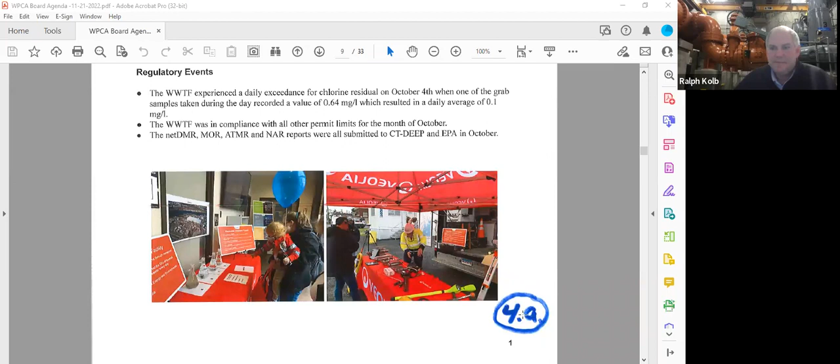Everybody can see that, there's a couple of our pictures from the open house for DPW. So the picture on the left is in the office. You can see that we had different kinds of water - influent, primary effluent water, and I believe tap water on display to show the differences in the treatment process.

And on the right is our camera truck or CCTV truck, and that's our collections manager, Tim Sullivan, showing the public different instrumentations and telling them exactly what they do around the city. So that went very well. Unfortunately, I couldn't make it there, but I heard everything was great.

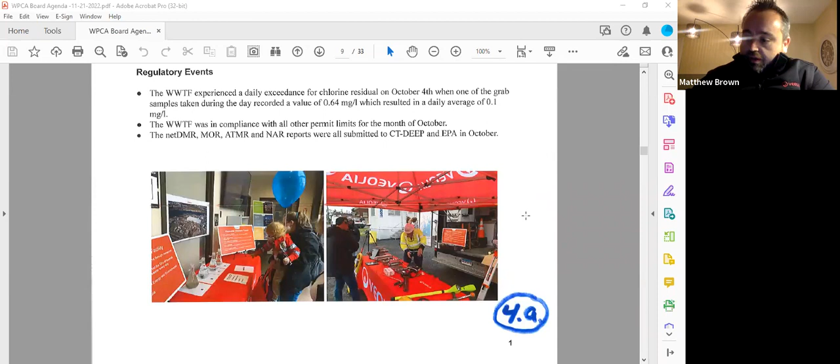So then Veolia, the collections team, we completed over 2.63 miles of TV inspection along with 2.32 miles of sewer cleaning. They also completed 57 manhole inspections. The industrial pretreatment program, the IPP program, we completed 42 inspections, and we're on track to complete all inspections by the end of the year.

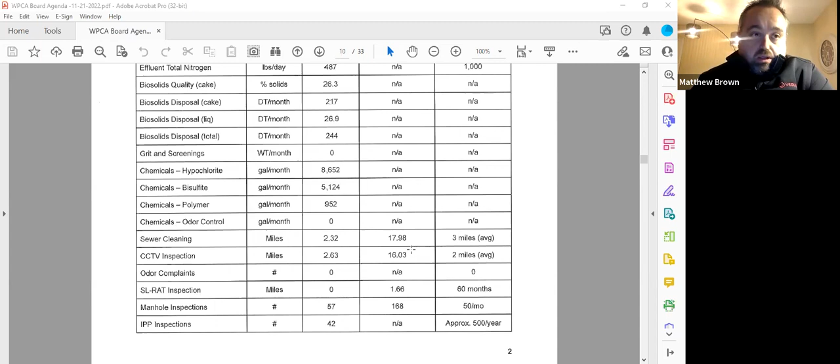We did have one regulatory issue in October, and that had to do with the sodium bisulfite pump losing communication with the SCADA system. We sample residual chlorine every 2 hours, so we did catch it right away, but it did create a daily limit exceedance. As far as everything else, we were in compliance with the permits for the month of October. That issue was corrected as soon as the operator ran the tests - he went out, inspected the pump, and got it running within that 2-hour window.

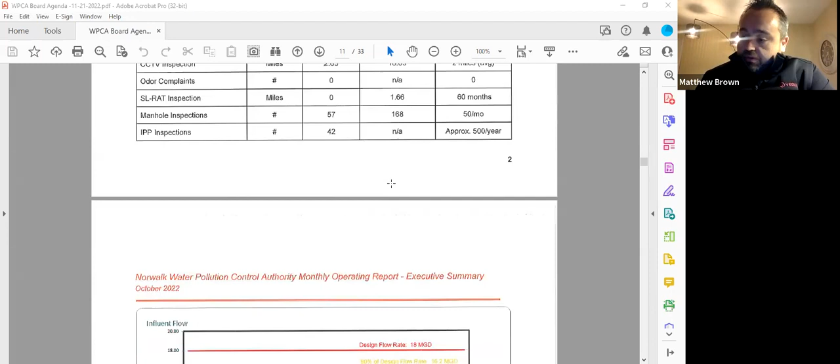The net DMR, MOR, and NAR reports were all submitted to CT DEEP and the EPA in October. A couple things I wanted to point out: our average daily flow for the month was 10.9 million gallons, and our 12-month average flow for the plant was 11.41. Then towards the middle of the page, we have effluent total nitrogen.

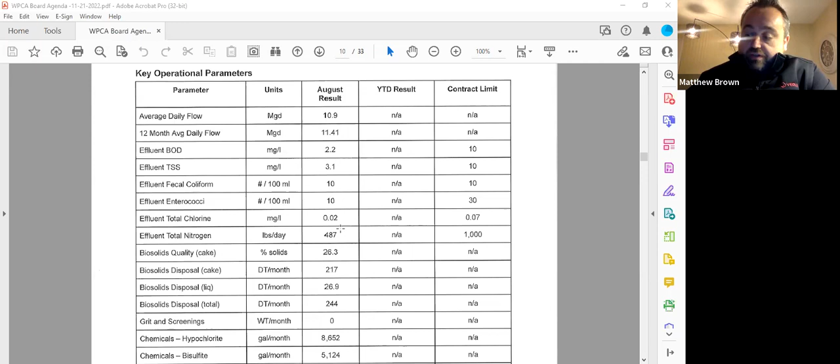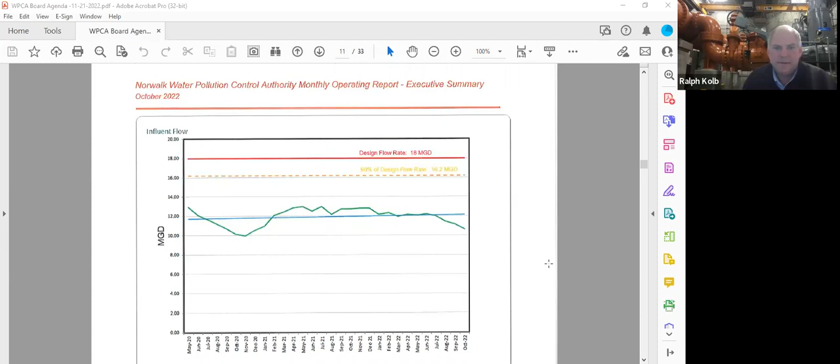Our total nitrogen is 487. Now if you want to go to the graph, Ralph. I believe this is new, correct? That is correct, this is a new graph we started including here. It's the rolling average since May 2020 when we took over to now. This is the influent flow.

You can see the design rate is 18 million gallons a day, it's the red line at the top. 90% of design flow is 16.2. That's the number that the DEEP and the EPA will use to require you to plan for upgrades, right Ralph? So that's why.

Correct, it's in our permit. If we hit this green line, which is the 180-day moving average for flow, if that approaches 16.2, the WPCA would have to submit a plan on either reducing flow to the treatment plant or looking at future expansion. So basically, the difference between the 16.2 and this 180-day moving average is our available capacity at the treatment plant before we have to do anything.

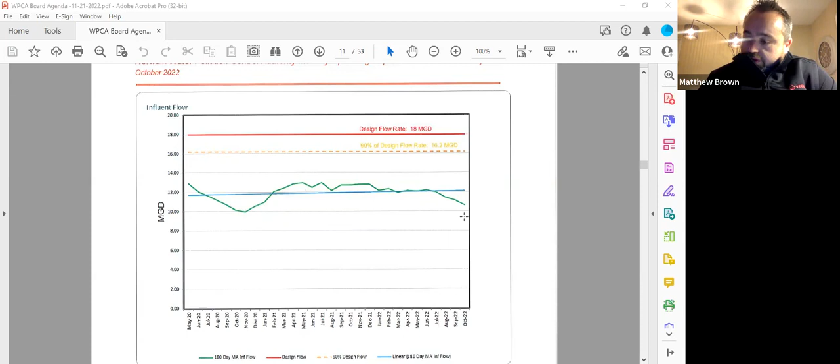I'll point out the dip on the left towards 2020 was the summer of 2020. We had a very, very long drought, very dry conditions, some of the lowest flows in the industry people were seeing in the Northeast. But on average, for the past 12 months, we are at 11.41, so we're quite far away from those numbers. And then I think that was it.

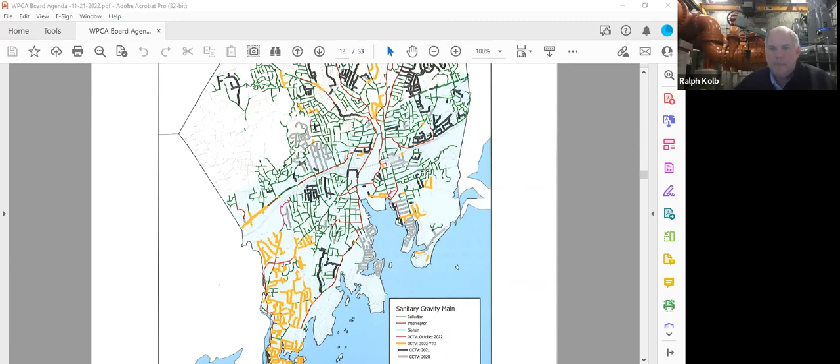And then there's 3 PRFs. You need to share those, Ralph, or do you want me to just go over them? You can just mention them. Okay, let me just take 1 second to bring them up.

Actually, hey Matt, item 4C is the contract year 3 letter. Let's talk about that first.

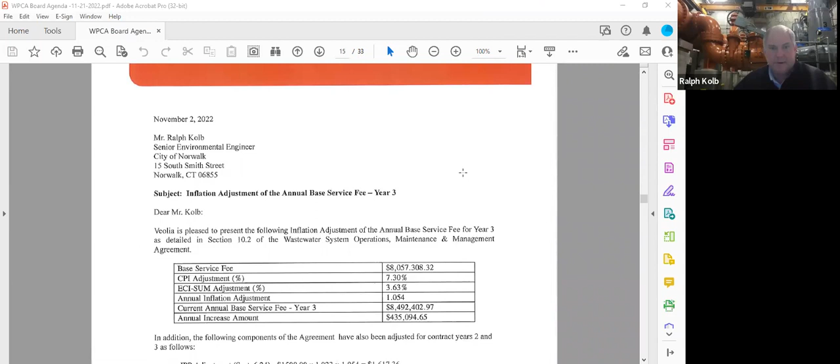I have it on the screen. Oh, you do? All right, let's see. Sorry guys, John just hid it. Okay, so the...

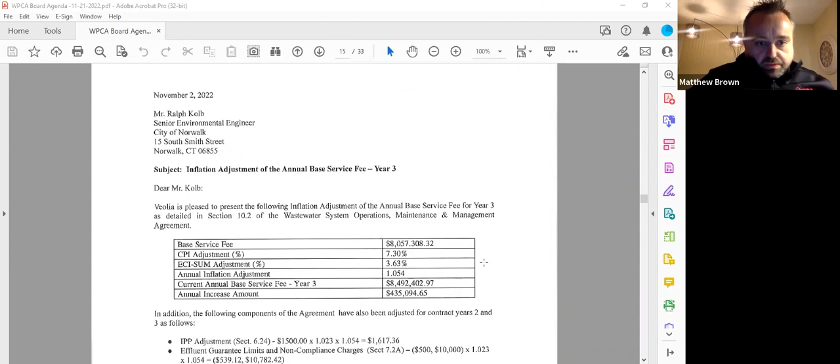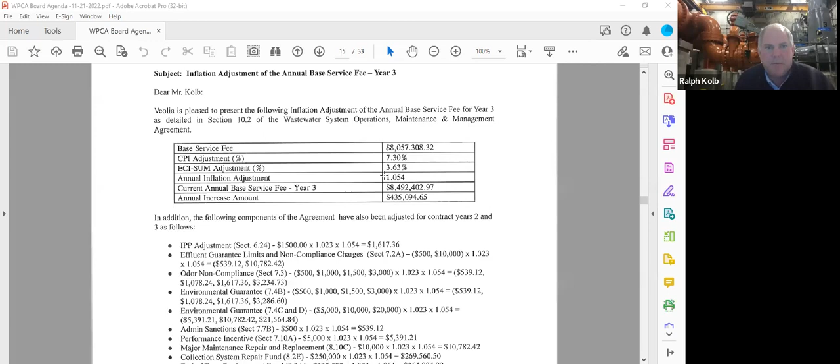Base service fee. You want to go over the CPI? Yeah Matt, I can explain this, I'm probably a little more knowledgeable on this, having gone over it with John. So basically, the contract with Veolia has 2 numbers that we look at: one is the CPI adjustment, which was 7.3%, and the other is an employment cost index number, which was 3.63%. The formula in the contract, when you do the math, came out to 5.4%.

That's where this annual inflation adjustment number comes from. They took the base service fee of just over 8 million, multiplied it by 1.054, which got us to just under 8.5 million, with an overall increase of 435,000.

Sorry, the Veolia team and myself had been going back and forth making sure all the numbers were correct, specifically the bulleted items down here. These were all conditions in the contract, and the team made sure all these numbers were bumped up according to the contract language. So we're presenting it a little late, but this is contract year 3 as of July 1st of 2022, and this was the overall increase.

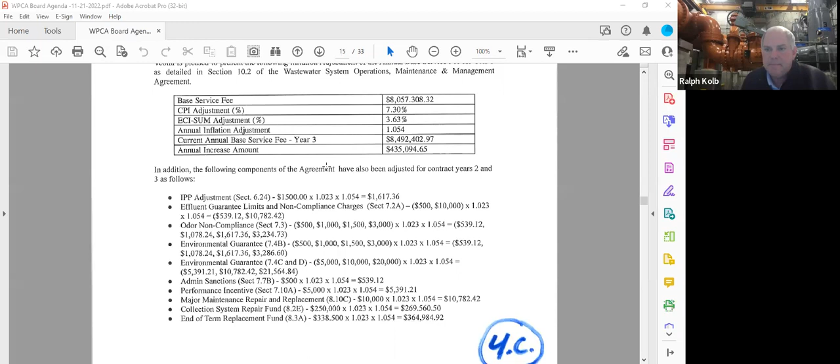Does anybody have any questions?

Okay, so I'll jump into these, these are procurement review forms, something we do for any large projects you've probably seen before. We fill these out in-house and share them with Ralph.

This 37,500 was for a backup Chicago pump for our Keeler Brook station. This pump - the Keeler Brook station has, I believe, two pumps, and they're critical, it's one of the critical stations that runs quite a bit. Their pumps are aging, and believe it or not, correct me if I'm wrong Ralph, I believe we ordered this pump a year ago and we just got it. Correct, so now we are putting through the statement, because obviously they didn't bill us until we got it.

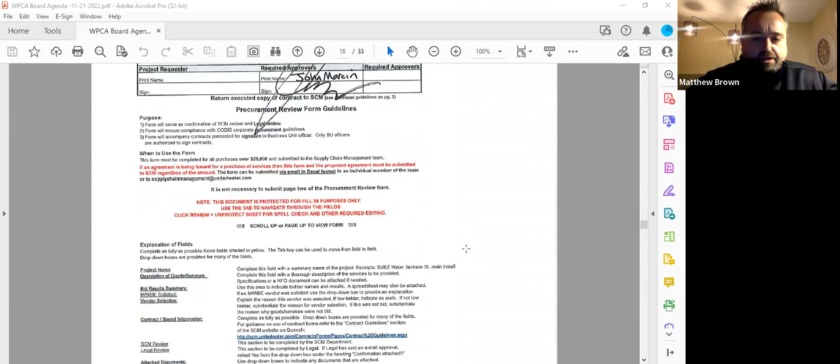So now we're passing on the bill. This is again a pump - a spare for Keeler Brook Pump Station. It is a spare, but I think they're going to install this and take out one of the other pumps to rehab and refurb it. That's correct.

The second PRF is Aaron Associates septic tank instrumentation controls. There was no scum removal in the plant, and one of our larger projects last year was a piping project introducing scum removal to get scum out of our system. This is for the electronics inside the holding tank that will hold the scum before it's pumped. That's what this procurement review form is for.

The final one for the month on the procurement review form is the backup float systems. At several pump stations, I believe this consists of 4 - this particular one... Fox Run, Calf Pasture, Howard Ave, and Bell Island.

And Huckleberry - oh, and Huckleberry. So what it is: if there is a failure of what we have, electronic level controllers called transducers, which run through a bunch of low voltage electronics, if anything goes wrong with those signals, the level controls will fail. A lot of our pump stations didn't have a backup for that. So what these are is just an old school float - when it lifts up it turns on, and when it goes down it turns off. A little more intricate than that, but it's a backup to the current level controls in those systems.

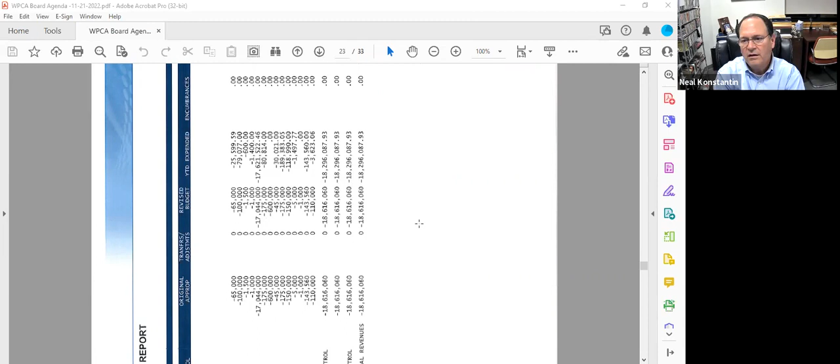Yeah, a couple of questions. Are those pumps interchangeable between stations? You said we're having a backup pump installed in one of the stations. Most of our stations are sized uniquely, so we generally use one pump manufacturer, except for this one.

This is one of the few stations we have Chicago pump - our typical pump vendor is Flygt. So the answer is no, this one would only work in this particular station. It is one of the older stations. It's actually what we call a drive shaft pump, where the motor's upstairs and a long drive shaft goes downstairs to the rest of the pump, which is the impeller and the volute.

The problem we faced when we took over, and in general, was that a lot of the pumps either needed spares redone, or some stations didn't have spares at all. So Ralph and our team have worked together to take inventory of all these pumps and make sure we have a spare for every single pump station, so if there is a failure, we can get up and running in as little time as possible.

To add a little bit onto what you just said - every pump station has redundancy installed at the station, but we also like to have a pump on the shelf. There are 5 or 6 stations that have this equivalent spare pump, so we don't have to have 5 or 6 for those - we have 1 or 2 that'll work. They're sized to handle the same total dynamic head, which is basically the engineering design for that station. So they're all very similar in pumping capacity, but for most of the stations we actually have a unique on-the-shelf pump, besides the 2 or 3 pumps at the station.

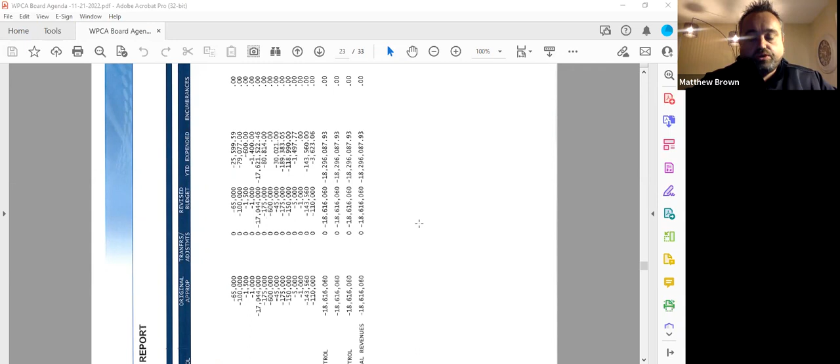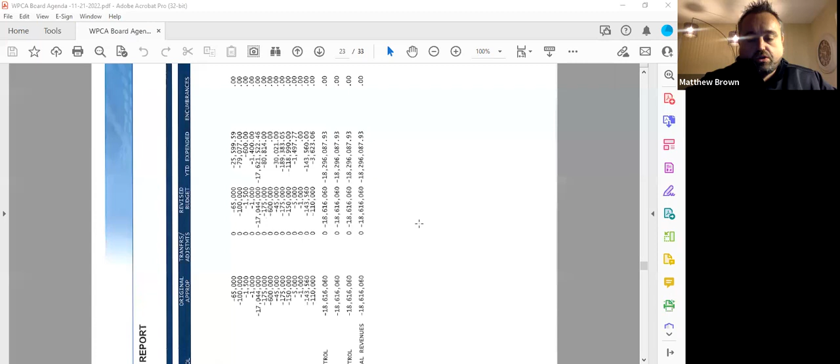One of those pumps is designed to be a lag pump, or a redundant pump. And then as triple security, we have one on the shelf. That's right, kind of standard practice. Some of our older stations that are due for upgrades will maybe use both pumps to keep up due to expansion and things like that. But the standard practice is to have a redundant pump already installed on site, and then one on the shelf. So that's what we're going for.

Gotcha, thank you. Oh.

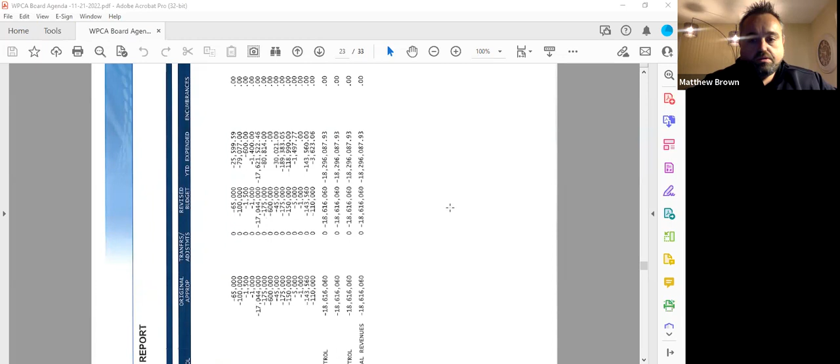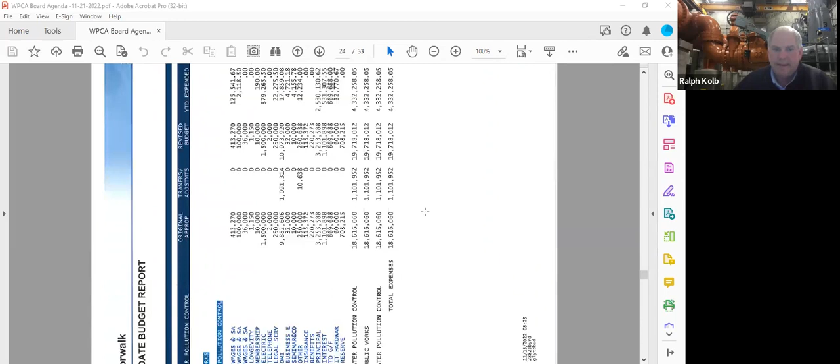Item 5A is our typical fiscal year 22-23 munis report, revenues and expenditures. I won't go into any detail, but if anybody has any questions, please let me know.

Item 5B, discussion on the WPCF facility plan update. The team has a wet weather meeting scheduled for December 1st. It's a workshop with Arcadis. As you know, we're in the process of preparing the facility plan update. It's due to the state by June 30th, 2023. The other thing to note, we had submitted a Clean Water Fund application for grants from the state for a 55% grant.

And that's actually been moving along. That's about $260,000 that the WPCA is going to receive through this process. So we just got an email a couple of days ago from the state requesting the WPCA chairman to sign off on the agreement, plus there's some other documents we have to provide. But like I said, we're moving in the right direction on receiving that grant, so we're very excited.

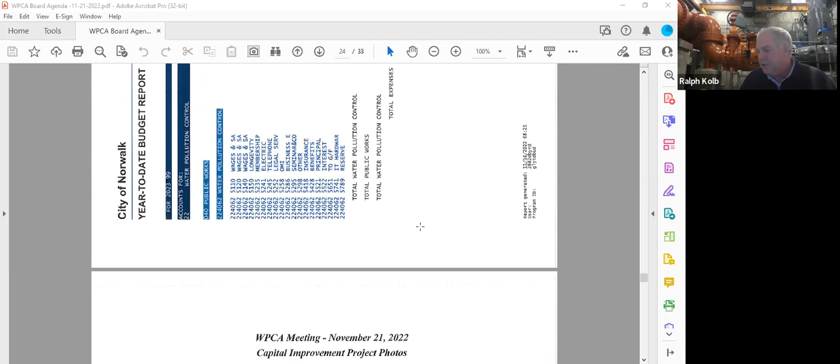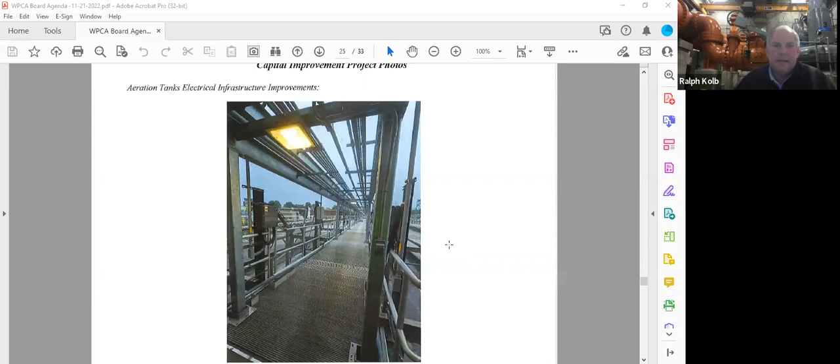Item 5C, what we're trying to do, instead of just talking about the WPCA capital improvement projects, we're looking to show everybody photos. So that being said, at the treatment plant, the aeration tanks electrical infrastructure project improvements are complete. The main task was the steel support system that you can see going in between the two aeration tanks, carrying both higher voltage and low voltage for our pumps and motors, along with our SCADA programming.

So there's a lot of controls out there on these tanks that have new conduit, new wiring. This also gives us a building block as we make improvements over future years, so new conduit and electrical can be run on the same structure system. That way, the whole purpose was to move it out from below the grates. It used to be below the grates, and what would happen is water would find a way into the conduit and create shortages or electrical problems.

In addition to this, we added LED lighting, so operators at night can turn on the switch, walk down, and have a lot more lighting to see what they're doing, grabbing samples or monitoring the tanks. This is all outside the solids handling building, where the MCC is actually located inside. Everything is new from the building out.

So you can see the control boxes, or the wires coming in from inside, are split and then running out to each of the tanks. This was just over a $1 million project. It was actually completed a little bit earlier than we anticipated, even with some of the delays from COVID, so we were very happy. And right now we're just doing a few punch list items.

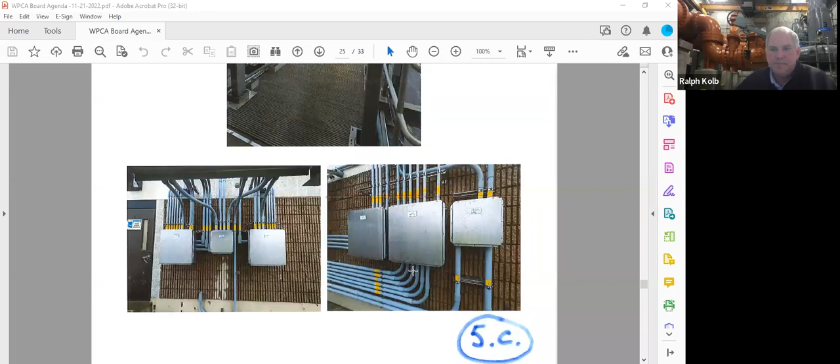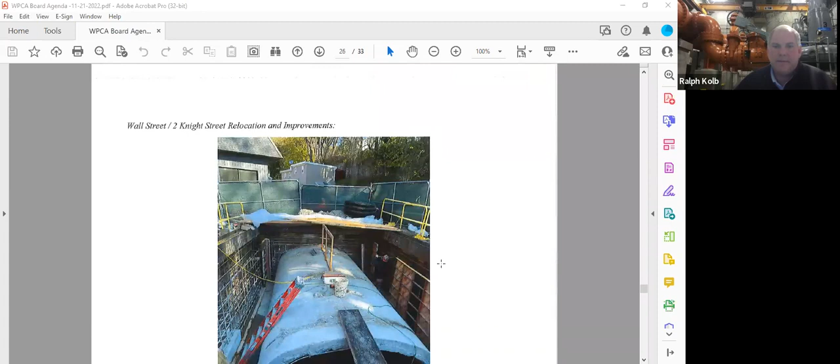The second project we have going on in the collection system is our Wall Street / 2 Knight Street relocation project. What we're doing here is we have a 30-inch oval pipe that goes underneath Knight Street. This project consists of moving it from underneath the building to a point around the structure. In order to do that, we actually have to put our pipe through what you're seeing here, which is a 77 by 122-inch storm pipe.

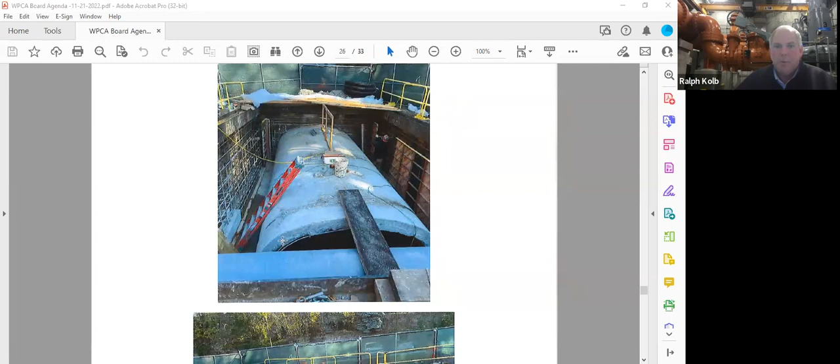So right now, this bluish pipe cutting through is our new sanitary sewer 30-inch pipe, and this is the old storm pipe that's active. Once this pipe is done, we're actually making a box around it, because the whole intent is not to lose the pipe capacity for the storm flow flowing through this large diameter pipe. When it gets to where we're crossing, it's going to expand into a larger chamber and then back into the pipe, so that we can maintain, I think it's like 940 CFS in that pipe for future conveyance.

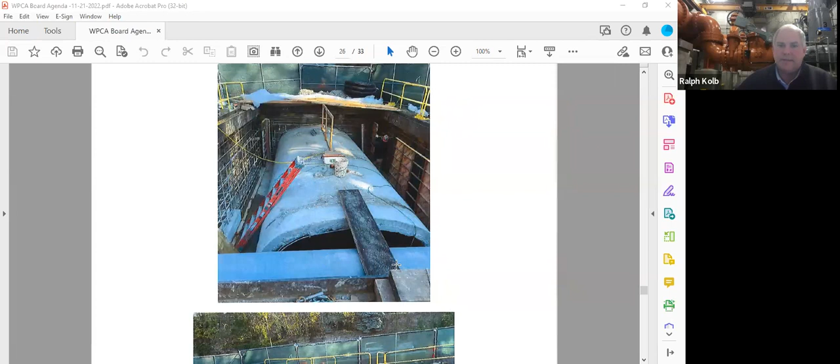We have a couple pictures. You can see it's all the geotech, it's where all the expenses are, and right now this rebar in here is where the chamber is going to be.

So once we're done and pour the walls, we're going to open up this pipe. Everything will be sloped, so it allows the stormwater to actually flow underneath our new sanitary pipe. And we have secondary containment, so that way we don't have any concerns about the 30-inch pipe, you can see the blue pipe, if that was to fail or leak where it'd be leaking into the storm, we have secondary containment already designed.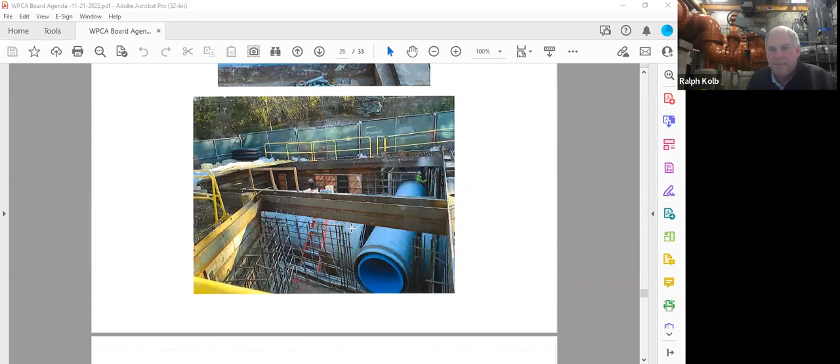So this project is about 2.2 million, and we're anticipating construction to be completed March, April timeframe of 2023.

The next project is our Bell Island pump station improvements. Oh, sorry, there's some misprint here. What we end up doing again, we're always trying to look to reduce risk at our pump stations and at our facility. So what we have here in this upper left picture, that's the force main.

It's an 8-inch asbestos cement pipe. And what a pump station does is flow flows by gravity from the local neighborhood to a pump station, and then the pumps pressurize a pipe and convey it up to a point farther away to a high point where it can flow then by gravity to the treatment plant.

So if we were to have a failure or a problem at the pump station, we'd end up having to bring in tanker trucks to continue to convey sewage, so not to back up in people's homes or spill out onto the ground. Or the other option is to bring in a Godwin pump, but then you can suck from the gravity line going into the pump station or the wet well itself.

But now you have to run a flexible pipe or hard piping on the surface to wherever you need to pump to. And for Bell Island, it actually pumps to Gold Road and Pine Point Road, which I want to say is like 1,400 feet away. But when you run piping on the surface, you're now blocking driveways, roads. You're creating a public nuisance.

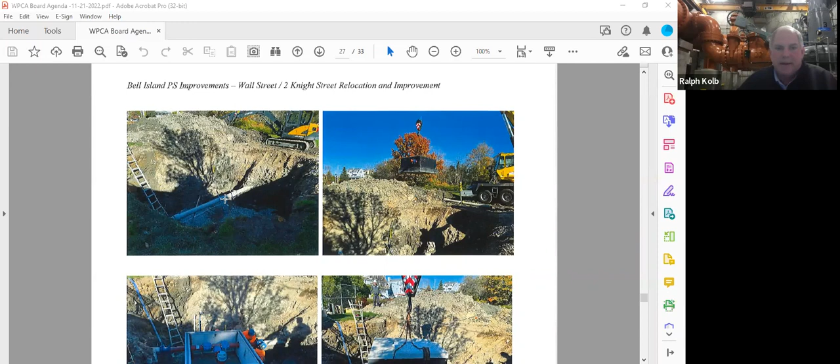So what we ended up doing was we cut out a section of the force main, and we installed this vault with valves. And here you can see in this picture, we're connecting it upstream and downstream.

And what this does or allows us to do is, in an emergency, we can come in with a bypass pump. We take the suction hose and install that into a gravity manhole, which is adjacent to this vault, to suck sewage from. And the discharge from the pump will connect into this bypass connection, which I have my cursor on. And then all we have to do is open and close valves.

And now we're using the pipe that's in the ground to convey sewage from the Bell Island area while minimizing impact to the residents.

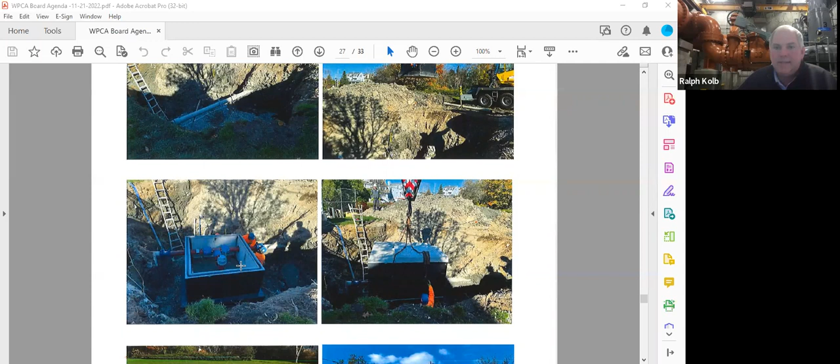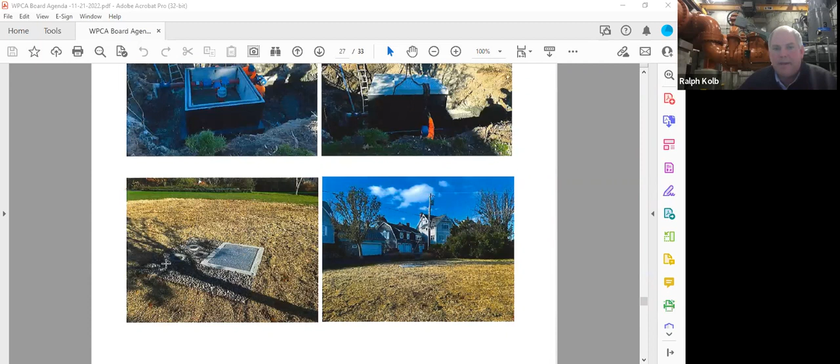So once we installed the vault, and it's about a 12 by 12 foot vault, you can see here we have a hatch to access the valves, and here's where you operate the valves from the top, from grade. Here's the 3 valve boxes, and then this is the restoration that was just completed a couple of weeks ago.

This is what we're calling winter restoration. Come the spring, we're going to go back and work with the Bell Island Association to restore it to before we disturbed the area. I know the biggest thing is grading and getting grass planted again. So that'll take place in the spring.

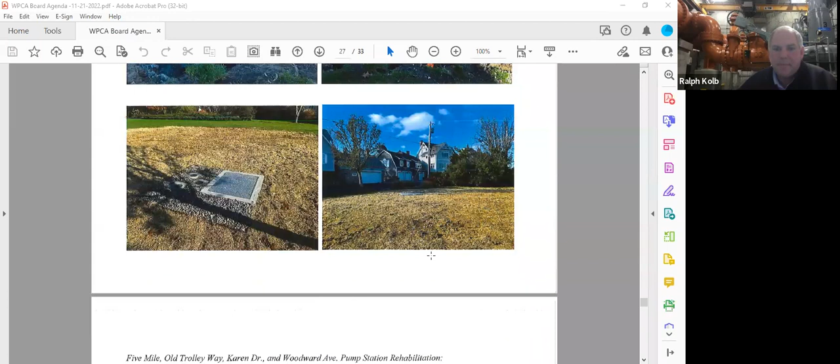Next project I have for discussion is our pump station, 5 Mile, Old Trolley Way, Karen Drive and Woodward Avenue rehabilitation project. First couple pictures right here are from the 5 Mile pump station. We have a new service that was just put in. And here's the new generator, concrete pad.

Not a lot of work's been taking place because the electrical has really slowed down the project. There's been a lot of back order. Some components, like the generator, are over a year out from when we ordered it, early January this year.

So once it went through the engineer design, we went out to bid, the contractor submitted packages for review by the engineer to make sure it conformed to the design. Once we gave the okay, they put the purchase orders in January, and MCCs, generators, we're still waiting for components to be delivered to the site. But as soon as that stuff does come, we'll be ready to go. All the mechanical piping, new pumps, all that has been received and it's stored right now in the pump station.

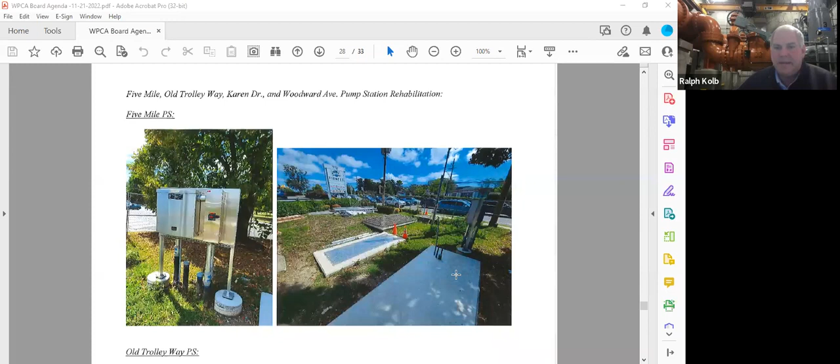Here's Old Trolley Way pump station, and there we did the same thing. This is the Kovacs contractors adding piping to add a bypass connection. So in this case, the valves are inside the pump station, the connection's on the outside. What we would end up doing is tying the discharge line from a Godwin pump, emergency pump, into this flange, and then opening up valves inside the pump station will allow us to utilize the conduit in the road, the pipe in the road to convey sewage.

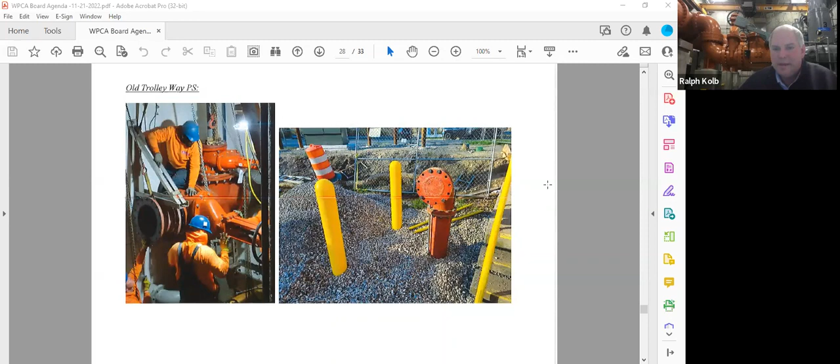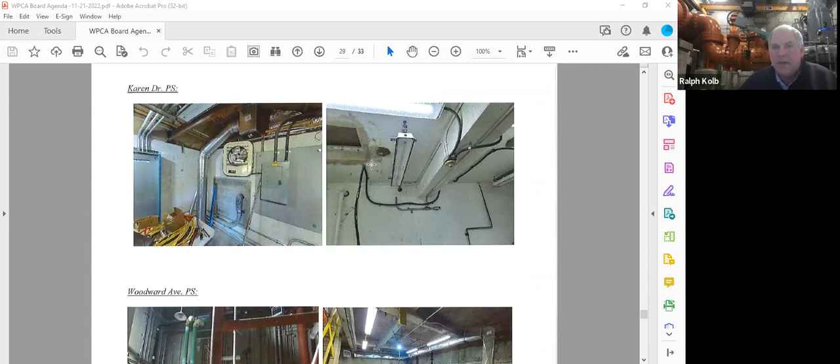Karen Drive pump station, more HVAC we're adding, electrical heaters, LED lighting. This is some of the work that's been going on. And then again, Woodward Avenue pump station, a lot of HVAC, LED lighting. We also have the bypass piping and new bypass connection outside the building, same as Old Trolley Way that we've installed.

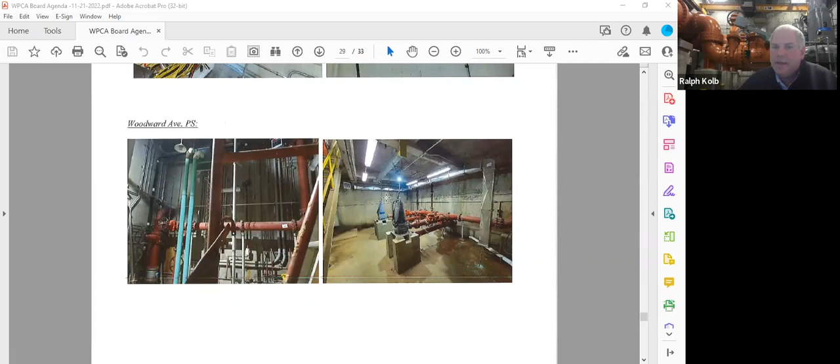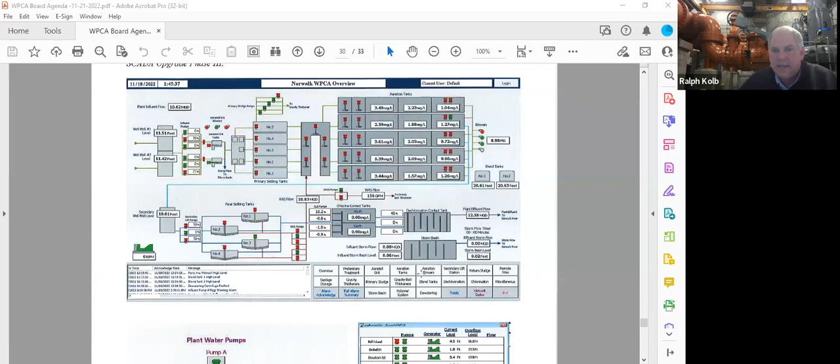And then the last project is our SCADA upgrade phase 3. I shared a couple screenshots. This first screenshot is what the operator sees on their overview screen, which is just basically showing the whole treatment plant and various different levels or pumps on, DO levels, flow going through the facility. And then all these little tabs down here to get in, zoom into a process at the treatment plant, you would click that and it would bring you into like preliminary treatment, aerated grit, aeration tanks, aeration blowers, and that would give us a lot more detail.

So some of the things that we've done recently, we've enhanced the system. Here's our plant water pump. So we're recycling treated wastewater, which now we call effluent, before it being discharged out to the sound. We're recycling it at just over 1,000 gallons a minute. And as you can see here, we actually pump B and pump C is red because those are online. Pump A and D are green because they're on standby. And what we're doing is we're pressurizing our plant water, and we use that for hosing down throughout the facility.

We have sprays going on at the aeration tanks to help with the process. So that's what that screen gives us, more information to know pumps are operating. If there's an alarm, we'll get an alarm. It gives us the pressure rate, the flow rate, so we have more eyes. So it's monitoring the system for us.

The picture to the right, this is something that is really useful for the operators. What it does is it gives us a picture of all 22 wastewater pump stations and 3 stormwater pump stations. It's by name in this column, and then pumps, we either have 2, 3, or even 4 pumps at the station. Red means on, green means ready for standby.

This yellow that you see, it's pulling the data from that station. So every 2-3 minutes, it's a radio system, and it's pulling the live data, the current data from each station. And then we have a generator column, tells us if the generator is on or ready for standby. This current level means it's the depth of the wet well level. So we know if we have a concern. If this level or the pumps aren't turning on and we have an alarm, we can monitor this level.

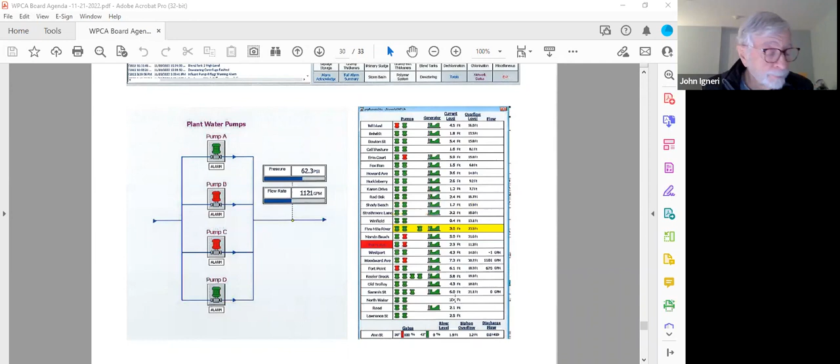Thank you. Good background. Yep. And we'll try to do this now going forward, giving pictures versus just talking. I like the pictures. Yes, that's why I figured. So do I, very helpful.

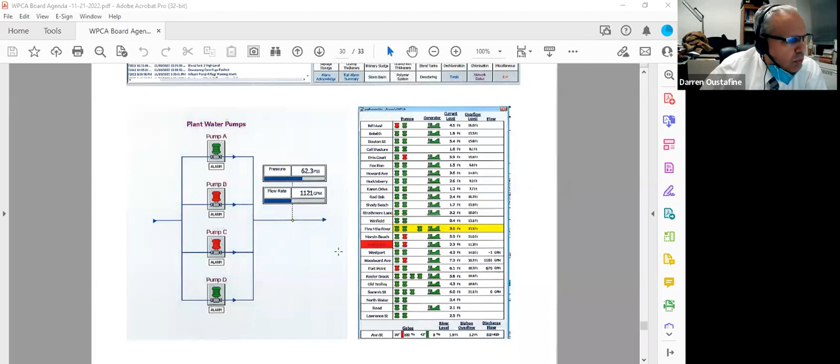Thank you. What could you possibly do, Ralph, at the Ann Street siphon if the level starts coming up and the storm's not too bad, but it sounds like you monitor it. What could you possibly do? Good question, Darren, Mr. Chairman.

Here's the answer. Down here we have gates, a 30-inch and a 42-inch, so there's actually twin siphon barrels. In SCADA, we have a program, an SOP, where the 42-inch stays closed, 0% open, and the 30-inch is always at 100%. If in a rain event the level starts to go up and we get to about 5 or 6 feet, the 42-inch gate will start to open, in increments of about 25%. The setting is around 8 feet, so before we hit 9.25, this 42-inch gate will be 100% open at 8 feet, and now we're maximizing flow to the treatment plant. So that's basically us doing as much as we can to allow flow to the treatment plant.

And what's also happening at the facility at the headworks, we have 6 main lift pumps. As flow increases to the plant, you go from 2 pumps to 4 pumps to ultimately 6 pumps running at 100%, pushing around 100 million gallons a day of peak flow through the facility. So we'll be maximizing our facility. During Ida, we had all 6 main lift pumps on at 100% to try to push as much flow through the treatment plant as possible.

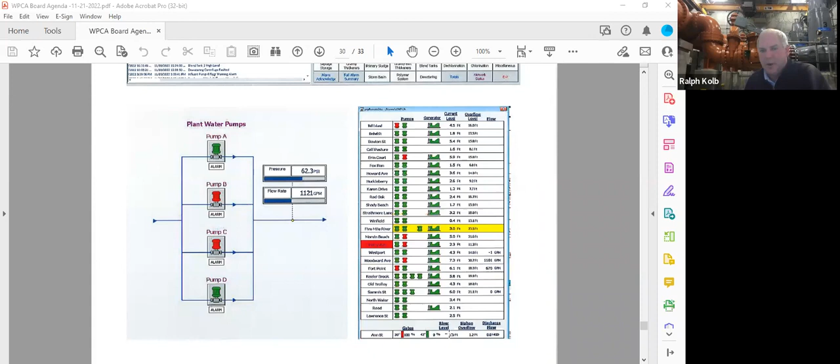Thank you, wow, very good. I guess you keep it closed so the siphons operate better under low flows. There's a couple of reasons why. One is we're trying to utilize our large interceptors for storage, because we also have outfall 002 at the treatment plant, and our goal is we don't want to discharge out of outfall 002 unless we have to. Outfall 001 can push 30 MGD, and we have to push 30 MGD through full treatment before outfall 002 can discharge. So what we're trying to do is back up the system a little to utilize our storage capacity. But when we get to 5 or 6 feet, we're already around 30 MGD or very close to it, so when we open that secondary 42-inch gate, we're allowing more flow to the treatment plant, and the likelihood of a discharge out of outfall 002 increases. It's a permitted outfall, so we're allowed. Again, we're trying to minimize outfall 2 discharges by using our storage capacity, but we're trying to avoid an Ann Street overflow discharge at all costs as well. It's all programmed in SCADA, and it comes down to the intensity of the storm, and whether it's an act of God storm, similar to Ida.

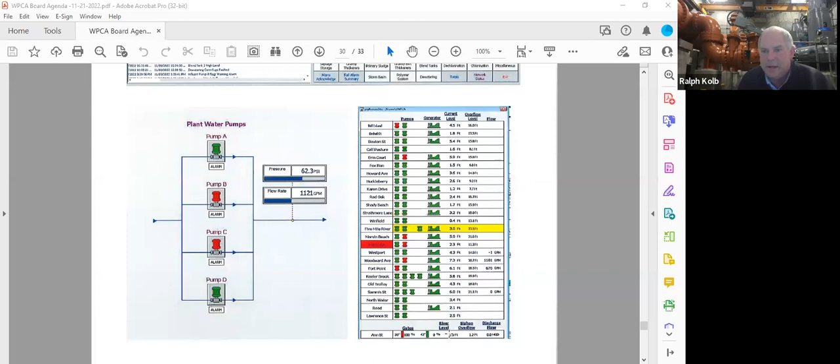Thanks, Ralph. Thank you.

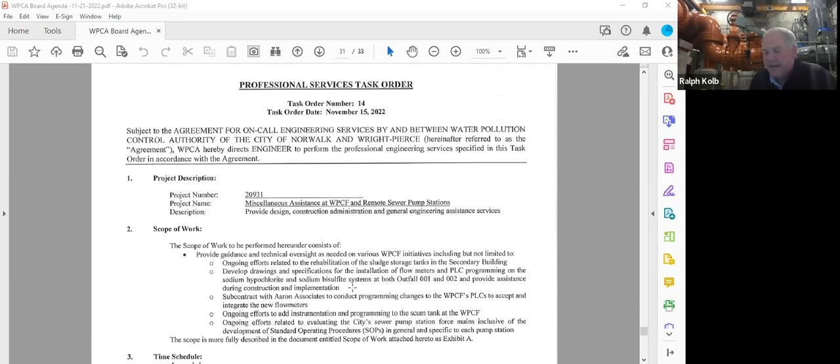Sewer use bills and appeals to date, there haven't been any adjustments since last month. We're still at $39,341.

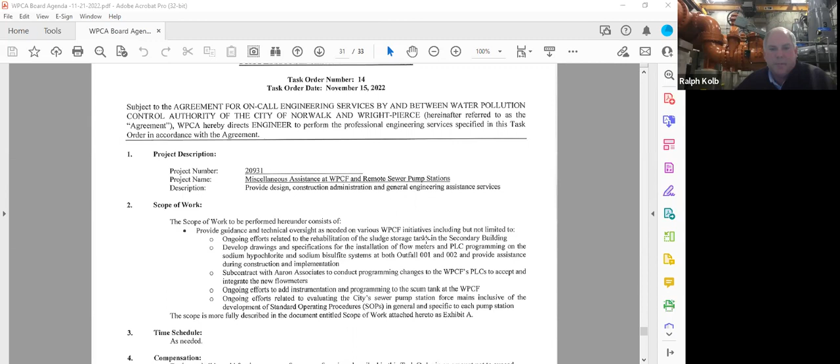The last item is an information copy, a Wright-Pierce task order, number 14, providing miscellaneous assistance with pump stations and at the treatment plant related to pumps, in the amount of $65,000. This isn't a new contract; this was money already approved by the board under an existing contract, and we're just linking it to a task order with Wright-Pierce.

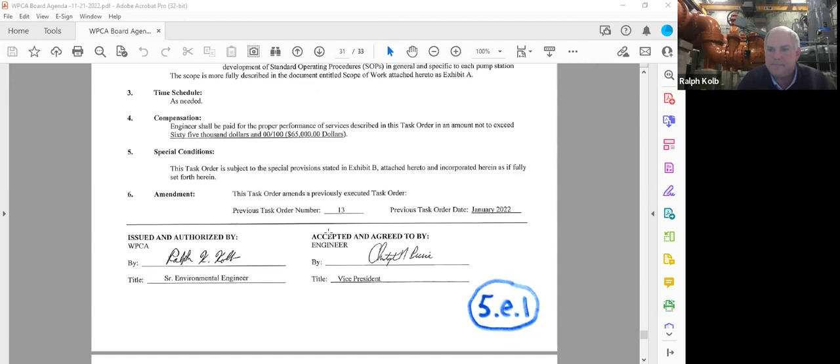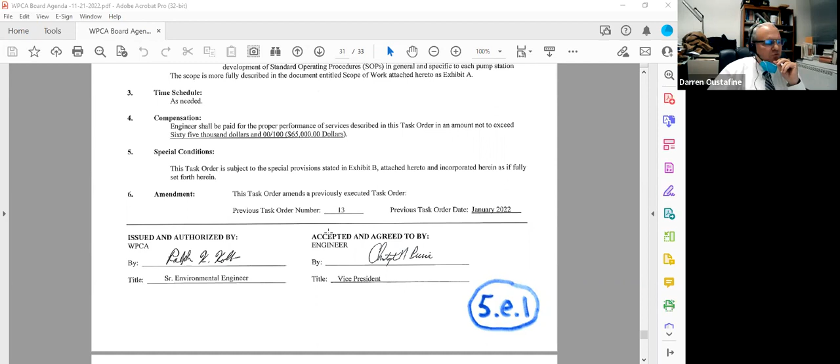That's it. Any questions for staff? No questions for staff. Any questions about anything on the agenda or not on the agenda?